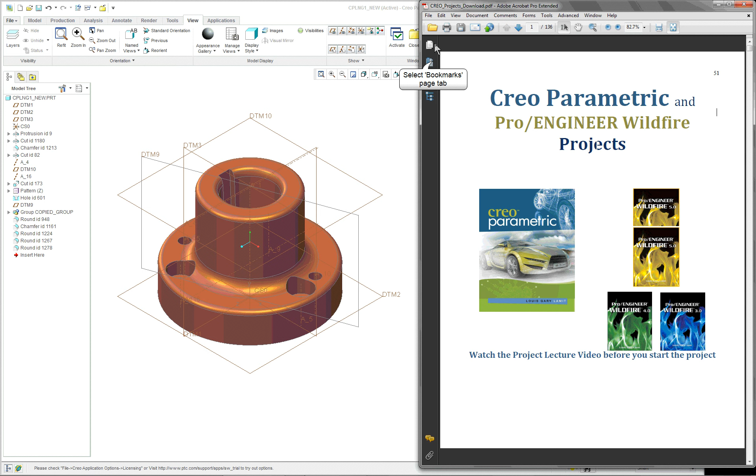This project is the taper coupling for the coupling assembly. We want to open up your project sheets, and I'm going to go down to our taper coupling on the bookmark, and you'll see that there's a complete set of drawings here. There is not any step-by-step information, so we're going to go over a sample of this.

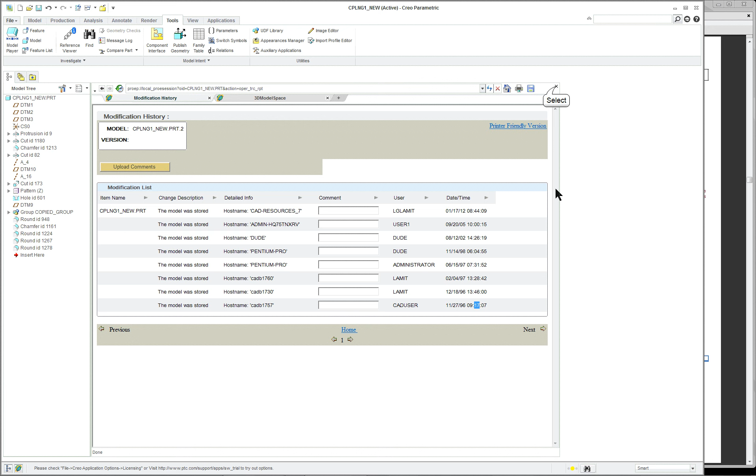I already opened up the part and put it into isometric. One of the things I want to do is take a look at the history, the file history, and you'll see that originally this was in 1996. So it's an old part created with, I would say, Pro Engineer 15 or 16, an old version.

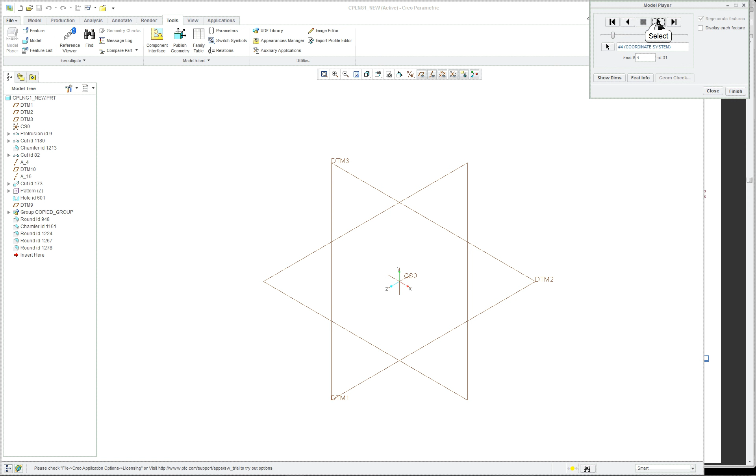So you're going to see over here in the model tree some different aspects than you'll see in Creo. But I've kept this part exactly like it was modeled in the beginning to show you some of the do's and don'ts. So I think what we'll do is go to the model player and start from the very beginning with our standard datum features, and then our first revolved feature. I think this is a pretty good way to start it.

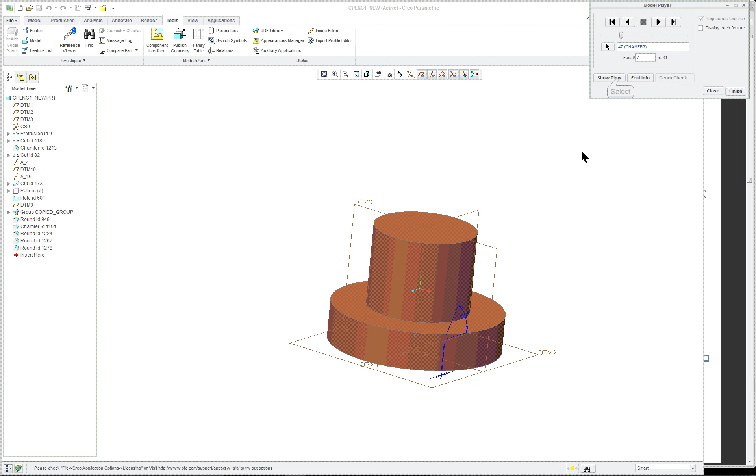It looks like they put a cut in there, and they put a chamfer on the bottom, so they're working on the solid portion. And then all of a sudden they do everything at once, and this is what you want to avoid. We'll go in and look at this later. They did the taper cut, everything all in one section.

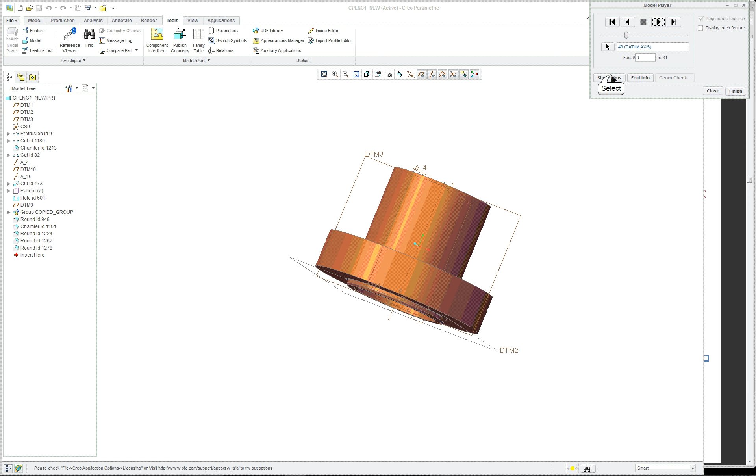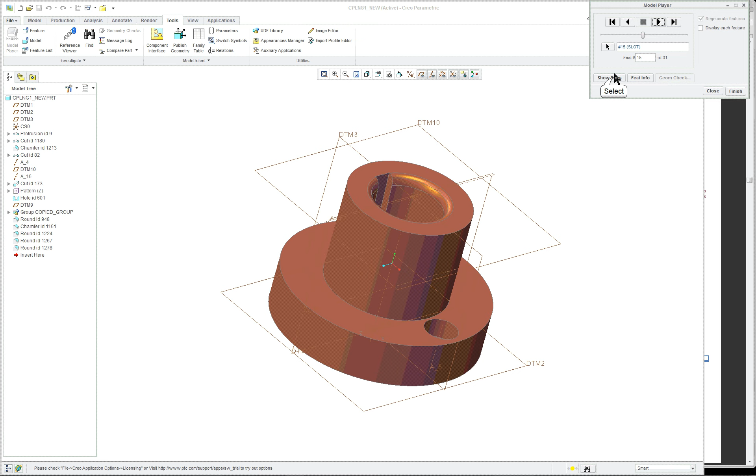Through a couple of other things. I think in general you got some rounds and some other items that they added to it. So there isn't too much as far as complicated geometry after this. You can see they put the cut down the middle here for the keyseat. And then they did a revolved cut here, and then they patterned it.

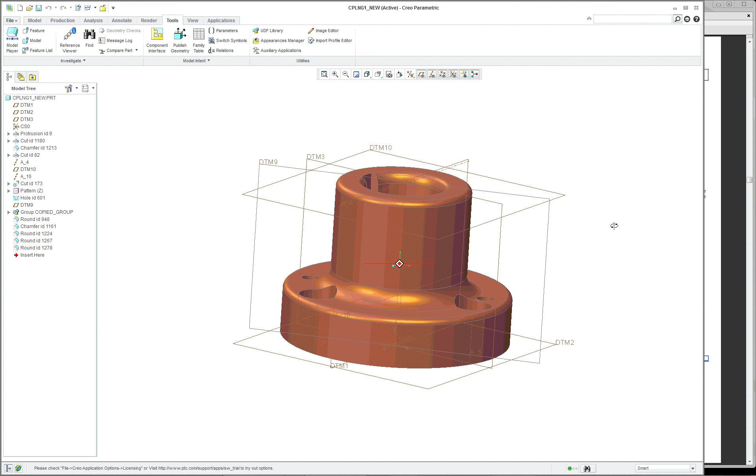So I'm going to push it all the way to the very end here. I'm going to take a look at each feature individually. Again, the very first one is very simple. They just did a revolved protrusion, and they've got their diameter dimensions in there, fairly clean and simple.

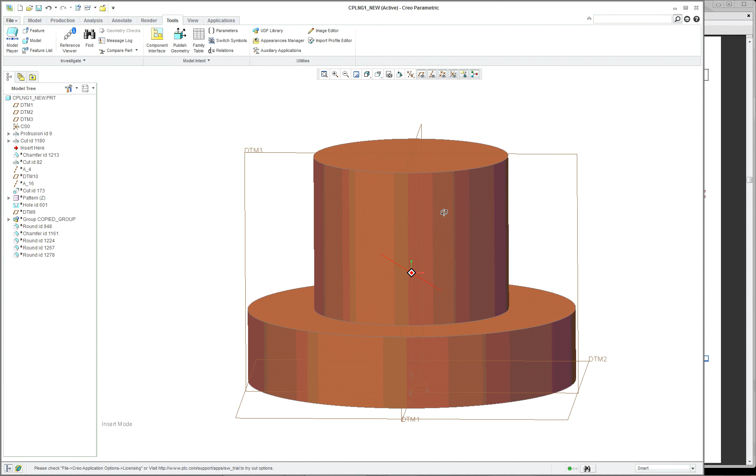I think what I'll do is back this up. Go to the cut next. They did a little cut on the bottom. I'll go into the sketch view. So it's just a simple relief cut.

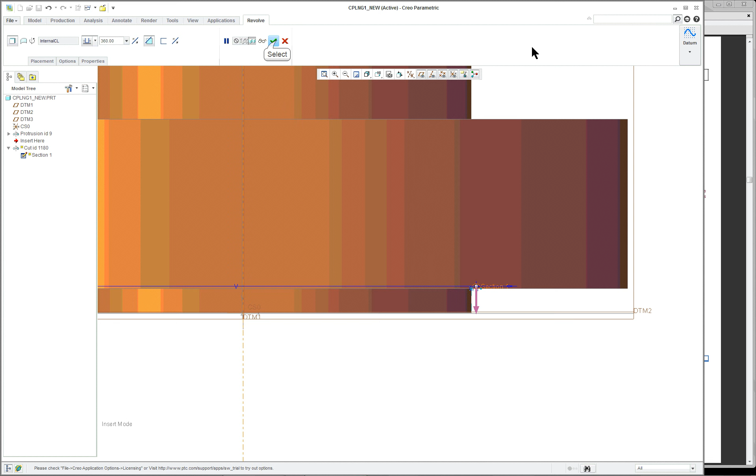They put a chamfer, another cut. Let's see where this one is. Okay, this is the one we want to take a look at.

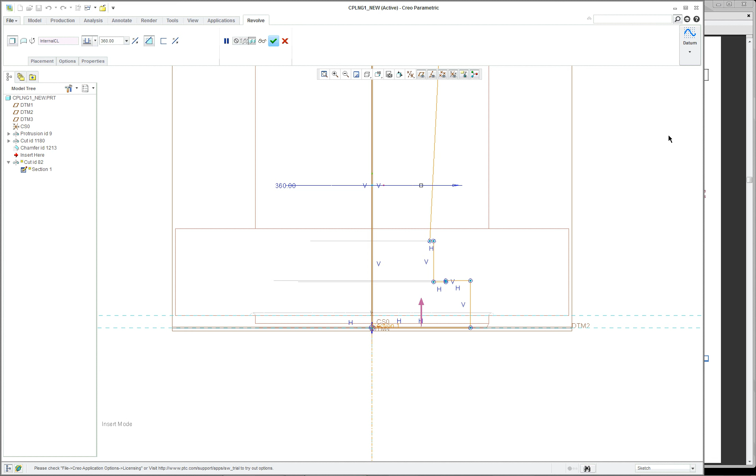It's a closed section, and let's turn on hidden line. Now it should have been a closed section. Maybe it is not a closed section. Should be shaded, I'm not seeing a shaded. Let's go into the section. There's our shading, and you can see they've done an awful lot at one time.

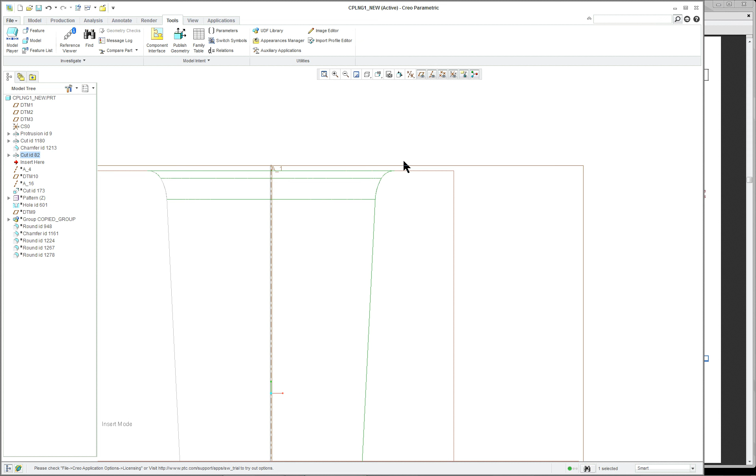It's a very complicated section, especially up in here. So I'm going to come back out. Let's investigate this a little bit. Let's really take a good look at it.

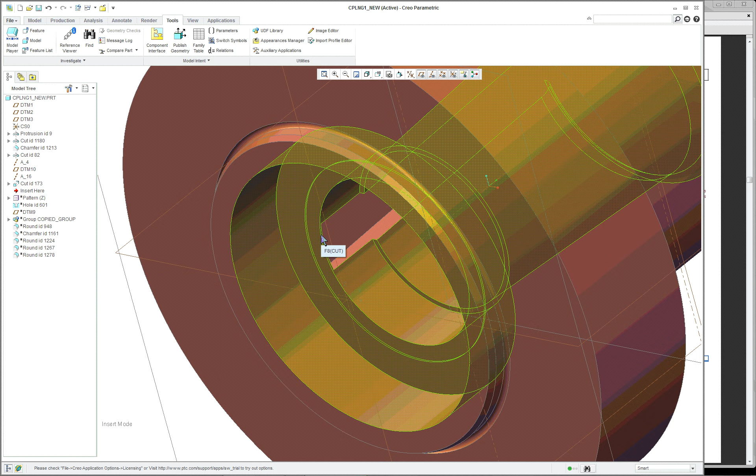So I'm going to come down. Let's see how far I want to go. Okay, I want to go down to the counter, the keyway. You'll notice here that they didn't make their keyway go all the way through to the counter bore. So this is a problem. We'll deal with that when we get to the key seat.

This cut is far too complicated. Should divide this into pieces. And I'll go with no hidden line, and maybe we'll shut off all our datum features just so that we can see it a little bit cleaner.

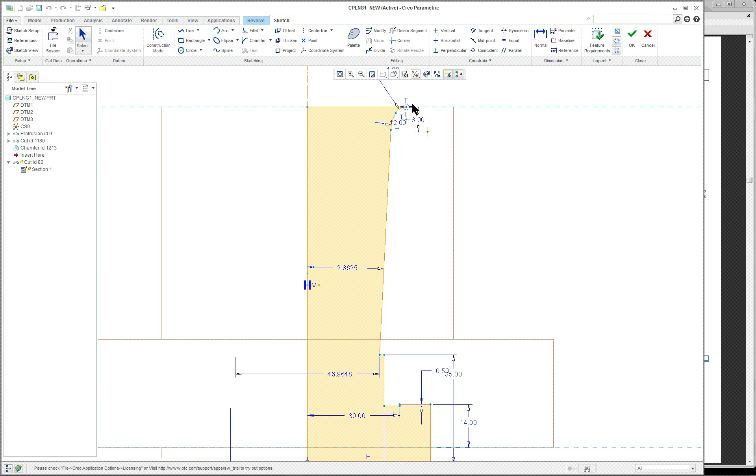So basically the problem here is you should have just done the tapered cut with the information on the top for the rounds, and it should have pierced all the way through. That way, no matter what happens to the ECOs or changes for the design on this counter bore on the bottom, this could have been put in separately. The taper should go all the way through the whole part.

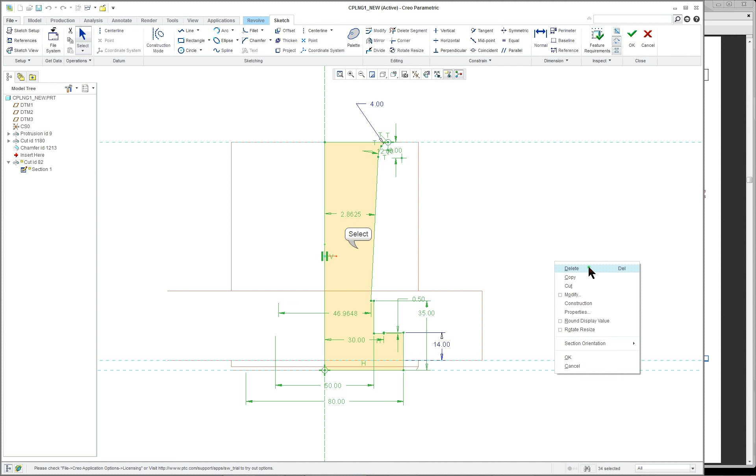So let's delete this. It's referenced by a bunch of other stuff, so.

All right, so let's start off with, we do have our references. There is a reference to the very bottom. There's an extra reference here, we can delete that, we don't really need that as a reference. We need the very bottom and the very top, and we need the axes here too, or the datum plane. We'll use the datum plane.

And we'll put an axis of revolution in, so that's a different command that was not available back when this was originally created. We had to put the axes in as a center line and then identify it as the axis of revolution. So we want to go all the way to the very bottom here.

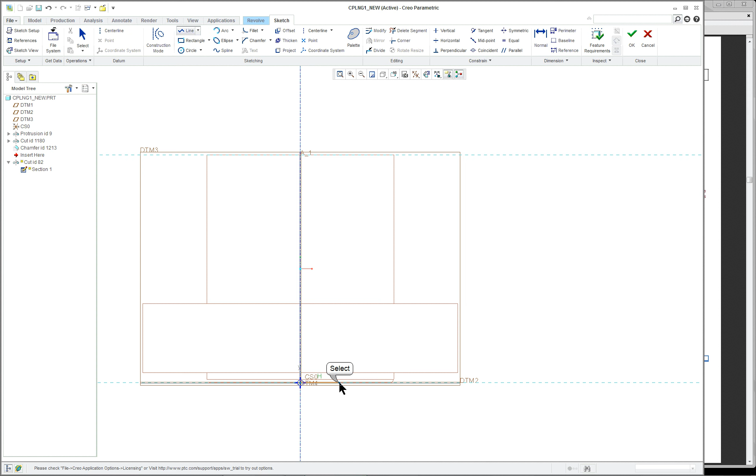So what we're going to do is start off with our line chain, and I think I'll start off at the origin down here. I'll come over and I'm going to go up near the top, but I'm going to stop. Here's the top, I'm going to stop here.

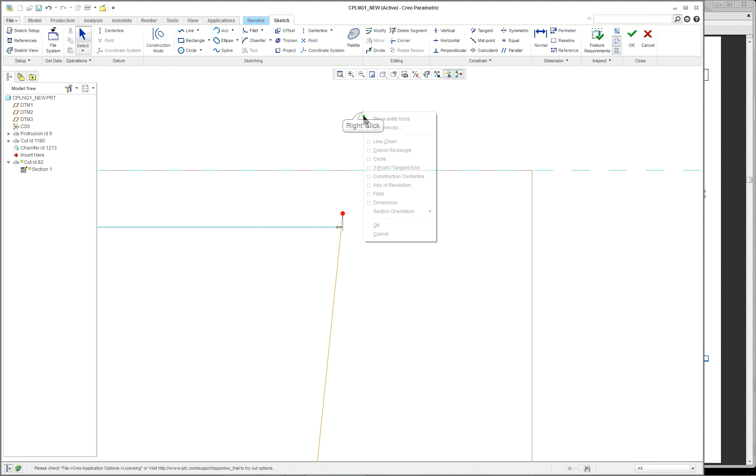Now I'm going to zoom in, and right mouse button, I'm going to use the 3-point tangent, hook it to the line, and aim at the top, not go all the way to it. Kind of a steep angle here.

Then we're going to use a fillet. We're going to click on the curve and the top, and then we've got to zoom in. Got our tangency point. Got a lot of dimensions in here.

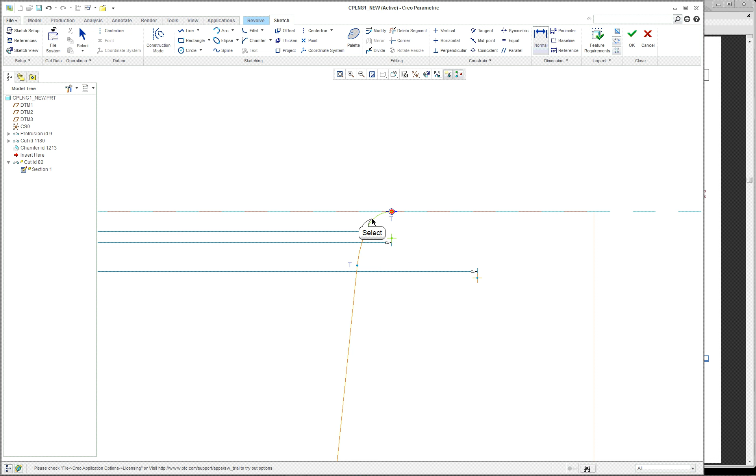There are a few things we're going to have to add, like a dimension. The book does want this. The project pages want these 2 radiuses. And there's also a diameter dimension, but we'll worry about that later because we're going to really want the diameter to go to this tangency point.

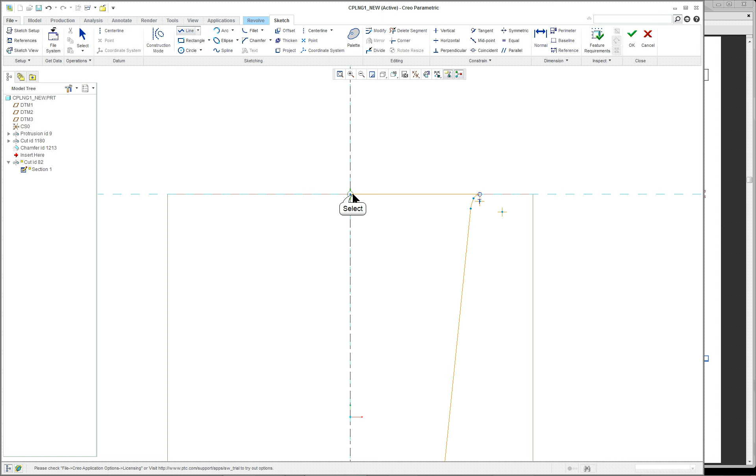All right, so let's finish this up. We want to make a closed section, like so. And we do want a dimension for our radius.

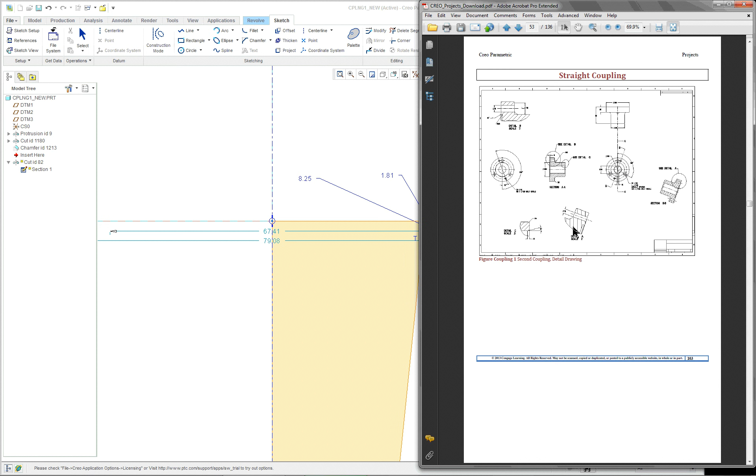So if we look at our dimensions here, let's go to, I think I have a section. We'll go down to the section. I guess this is the best one we're going to get in here.

For your taper, you can see the dimensioning scheme that's wanted. So you're going to have to do that. Right now we can leave it. The main thing that we have is these appropriate dimensioning scheme as far as our fillets goes.

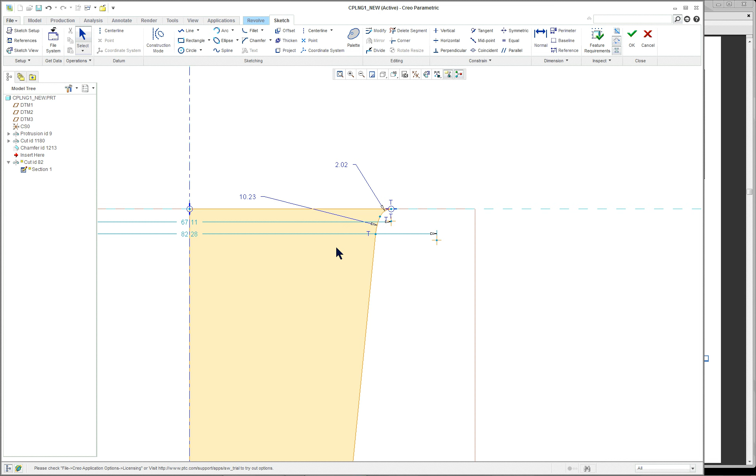Right? And again, you can add your dimension. I think which one they want is the one to the center point down here. And they want a diameter dimension. Let's see if we can get that one in there.

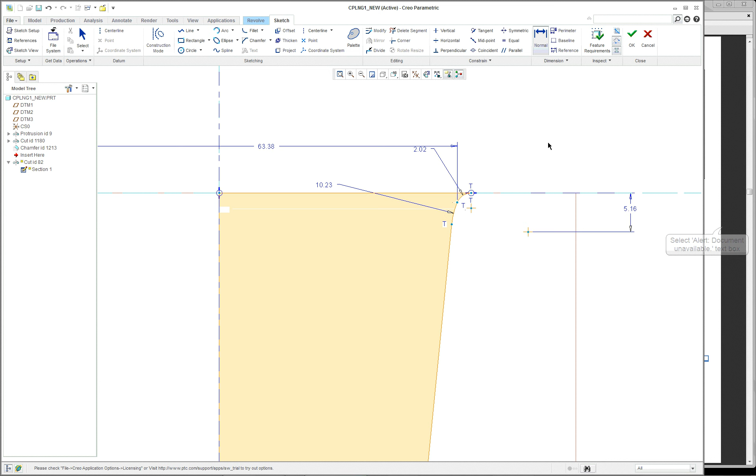So center line, point, center line, middle mouse button. And that's supposed to be, I think, 50 or something like that. Yeah, 50. So no matter what happens, the main thing also with this is make sure this angle is correct.

If it's not the same as for the taper on the shaft, then these will not go together with a coincident constraint. And that's very important. So this is 2.86.

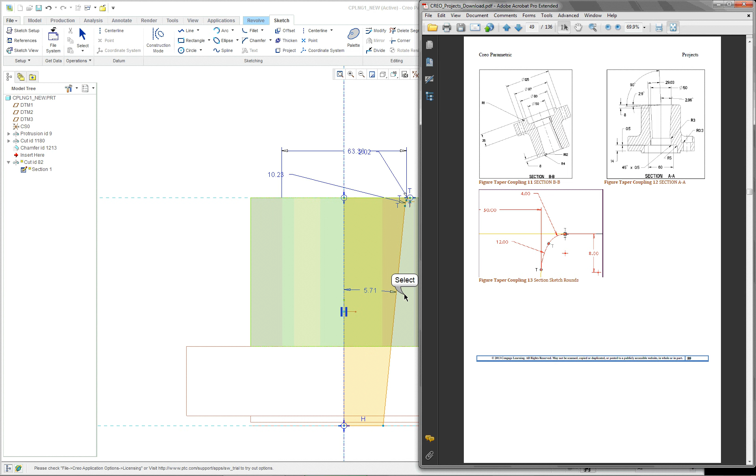And I won't bother to change all the other dimensions. The main thing to notice here is then when we're complete, this goes all the way through. So then you put your counterbore in here and you finish off the main part of the construction for the coupling.

You put your holes in, and we'll look at that, and also we'll look at the key seat. But the main thing here is that you're dividing the information into cuts so that one of them has just a cut, angle, taper, and a couple of rounds. Goes all the way through the part.

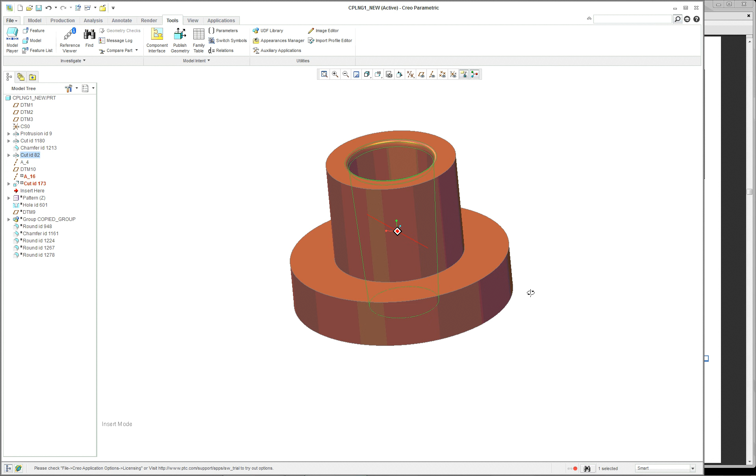So no matter what happens with the counterbore down here, it's not going to influence this first major cut of the feature. And we'll back that one out all the way, hopefully. Yeah. All right. So once you've done that, then you're going to put in this counterbore portion on the bottom.

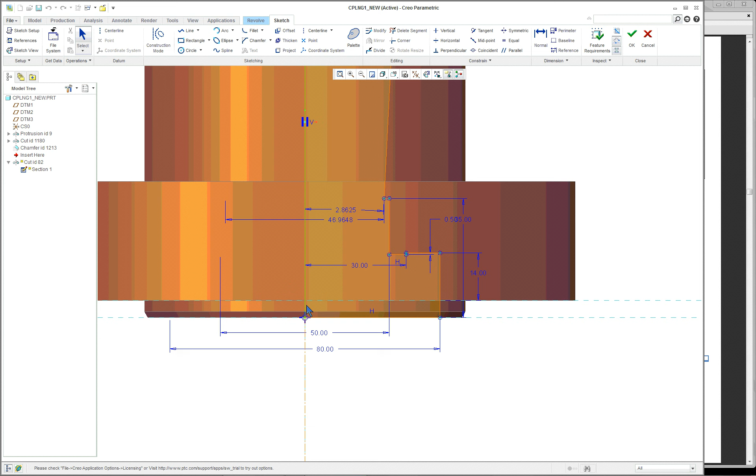And again, when you do this, this will be the second cut. And it'll be easy to divide the information up. You're just going to have this come over straight this way, and it's just going to be the bottom portion here that you put in. Much easier to sketch and accomplish that. You're not going to worry about the taper.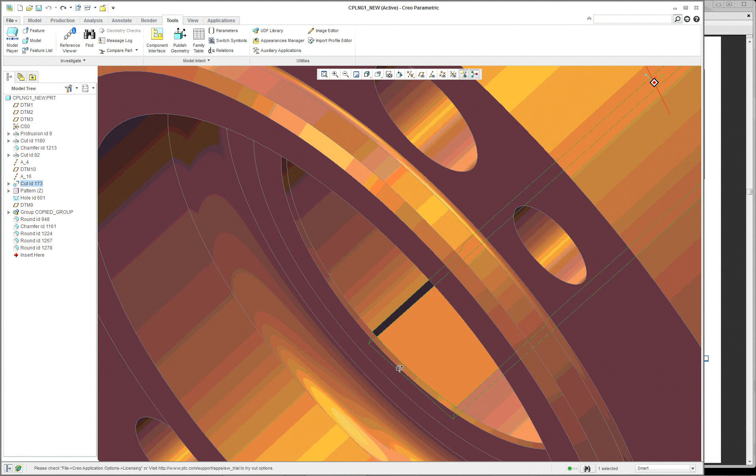So we'll go back out. Now, we did talk about the fact that this is incorrect. And we can see that it's forming a little lip down here. So let's edit the definition of that and see how they did it, first of all.

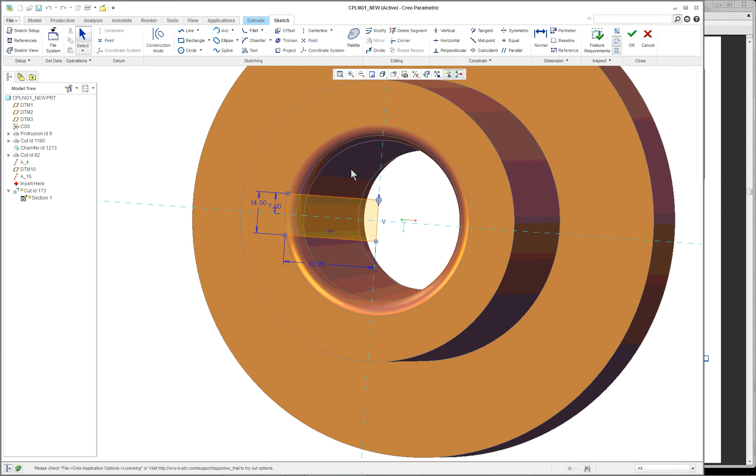So they did a lot of construction here. First of all, they had to put a datum plane in on an angle in order for this to work. Datum plane is perpendicular to the cylinder here. Then they put a cut through. Kind of strange. But what they forgot to do is to go through all. They only went up to this surface, and by doing that, they got that little lip in there.

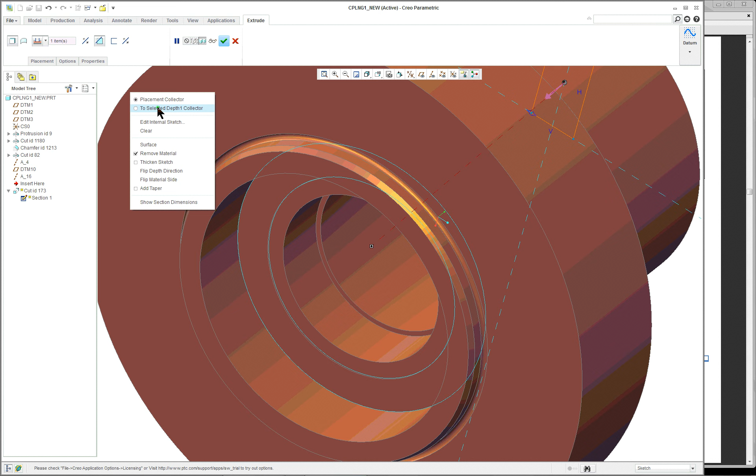In other words, the key seat never went all the way through. I mean, at the very least, they could go to the very bottom, and now the key seat goes all the way through. At the very least, that's what they could do.

But let's do this a different way. There is a better way than this. I'll turn on my datum plane, maybe the axes too. And I'm going to sketch on DTM3.

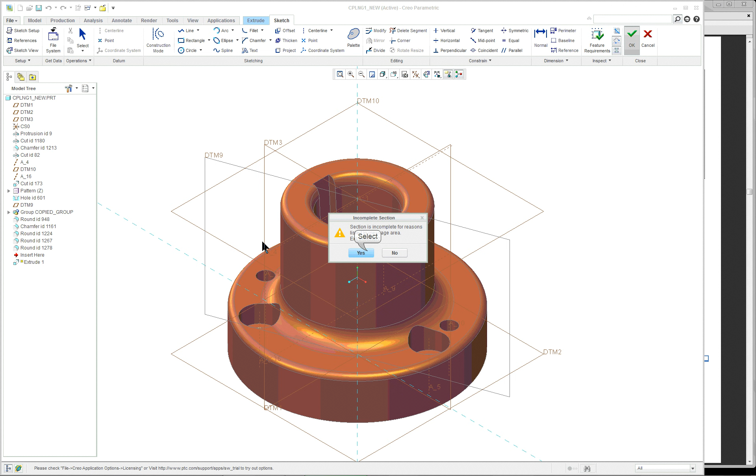I want to come out of here for a second. I want to make sure I pick my remove material. And I'm going to sketch on DTM3, like I said.

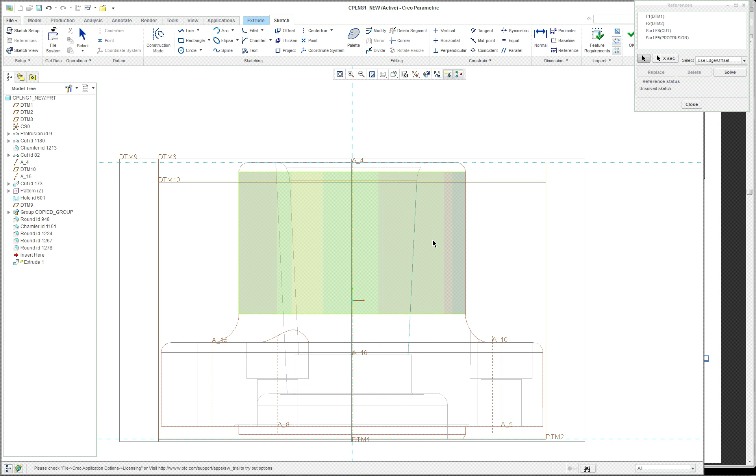All right, so here, instead of looking from the end, we're going to look from the side. And our most important thing here is the reference of the angle of the taper. We need one on the top. We've got one on the bottom also. So we simply need to do one line here. And make sure it's parallel.

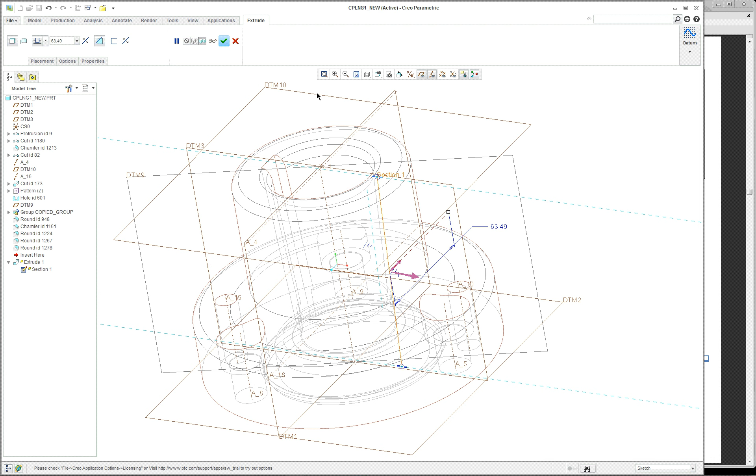You can adjust this dimension as per the book. And let's go back into our shading. And be careful here. You obviously want to know which way you're going to go with it. How about if we're cutting this way? Also, we want it to be symmetric. A little big.

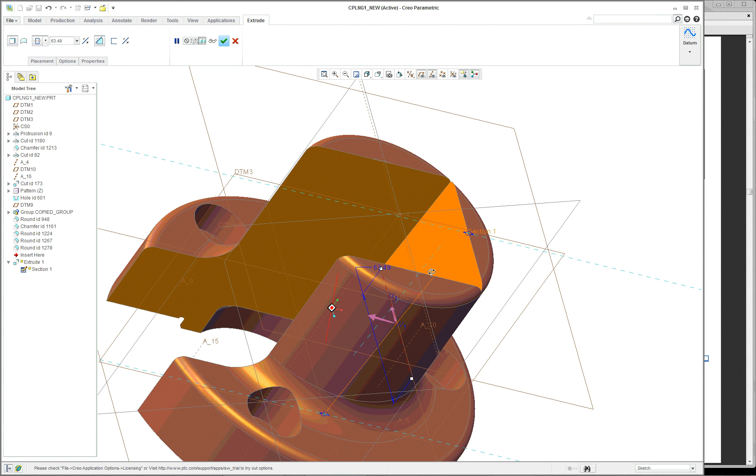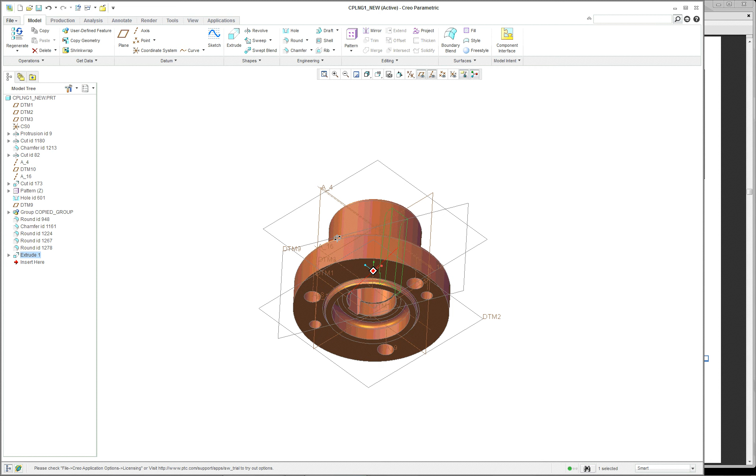I'll leave it kind of large so we can see it. So, one line. No matter what happens to the part, as long as the taper is there, the keyway will be there, key seat.

So the other one is more complicated. This is just one line, very easy to do. It's controlled by the taper angle, and you're done.

All right, so the next one we want to look at is the cut here. And we have a hole. Well, we can go through that one. Let's go through the slot. Now, a slot is nothing more than a revolved cut.

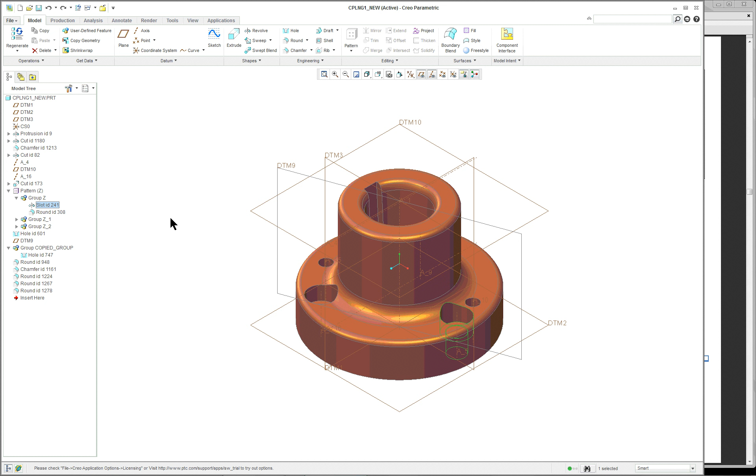So they did this a little bit different. Edit the definition of it. This is an old style command. When you do it, you're not going to be in the dashboard, so that's why it looks like this.

We'll go into the sketch view. Now, it's kind of interesting what they did. They just did a revolved cut. The only thing they forgot to do here is they forgot to use the diameter dimension.

So, dimension, center line, line, not center line, center line again, middle mouse button. Nope, I didn't get it. Let's try it again. So we'll try the line first. Make sure we're picking up the line.

Oh, okay, so the person didn't put a center line in there. So it looks like a center line. Let's see what it says. Nope, just a line down the middle.

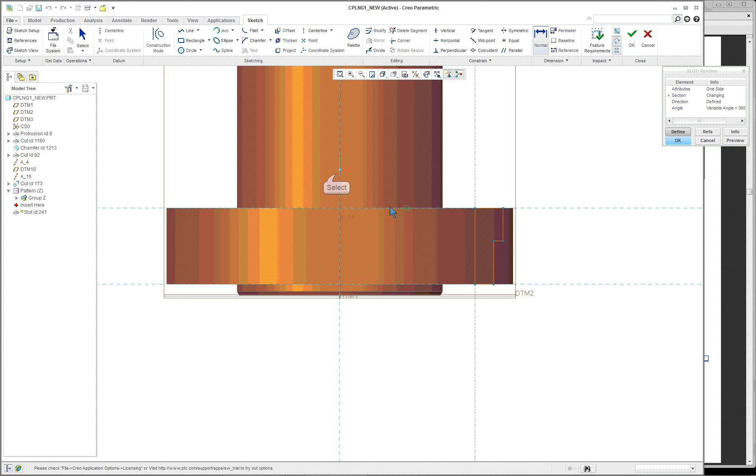So let's put a center line, axis of revolution down there. Okay, and then dimension, center line, line, center line, middle mouse button, and get rid of the half dimension.

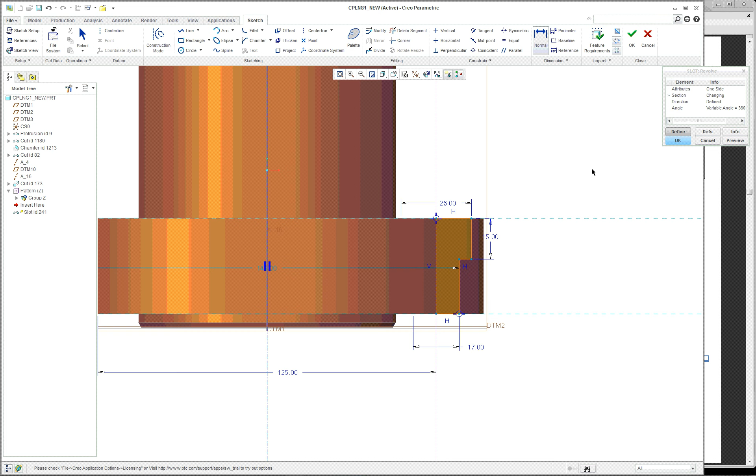So at least we have a bolt circle diameter. Now the other thing they did when they created this one, they used a revolved cut, of course, called a slot. Yours would be a revolved protrusion, removed material.

But they referenced the top so they could get the counterbore dimension in there. That's a good thing to do. Got the counterbore diameter here. Counterbore diameter, I mean the hole diameter in the bottom.

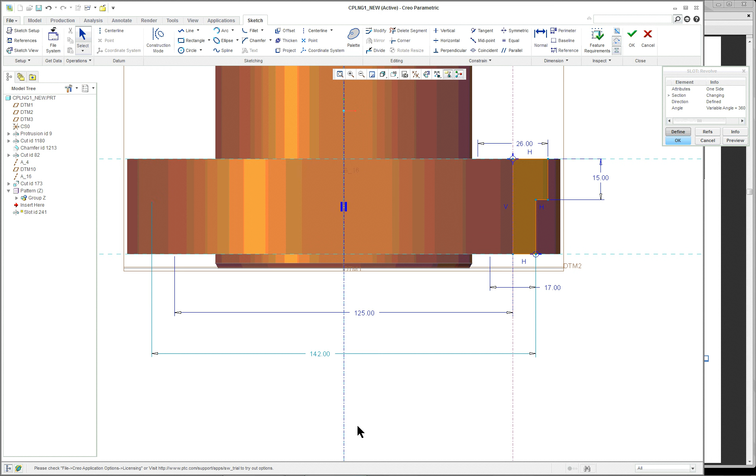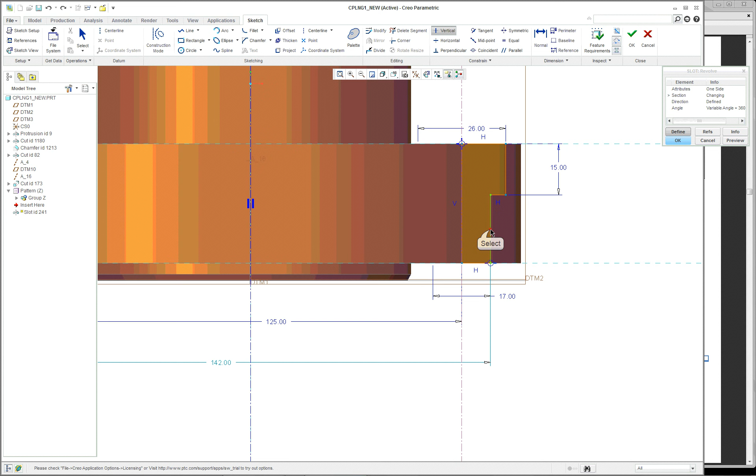I don't know what this is for. Kind of an odd dimension to have there. Let's change it. Oh, okay, so they've got something screwy over here. Let's put in a constraint. There we go. So we made that vertical and got rid of that extra dimension.

So this is one way to do it. It swept it around with the pattern. So I was messing around with that particular feature.

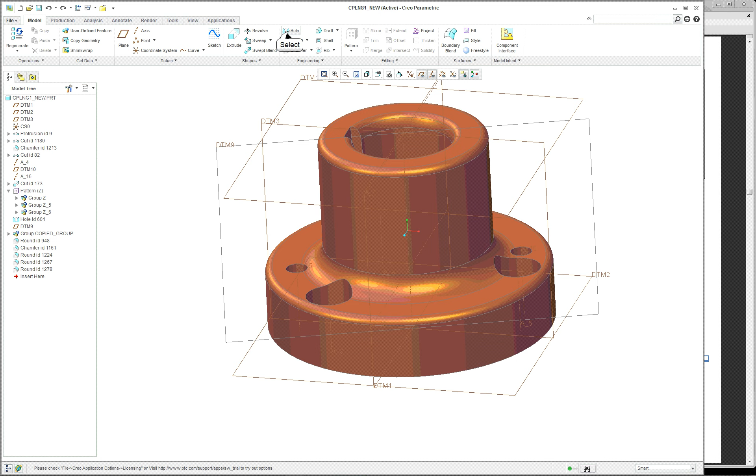So there's another way to do this, obviously, and that's just to put in a simple hole. So what we'll do to put the hole in, instead of using a revolved cut, let's turn everything on so that we can see all of our features. I had turned them off. And I think I'll go to the standard orientation.

And I'm going to put a new hole in instead of using the revolved cut. The type of hole is going to be a standard hole, no thread, clearance hole. It's going to be through. It's going to be a counterbore. And I'm going to place it on the same flange area here.

In the offset references, I want to pick the center line. But actually, I should have done this first. I want to make this a diameter. And then hold down my control key and pick on one of the datum planes so I get an angle. I'll leave it where it is. Let's look at the shape.

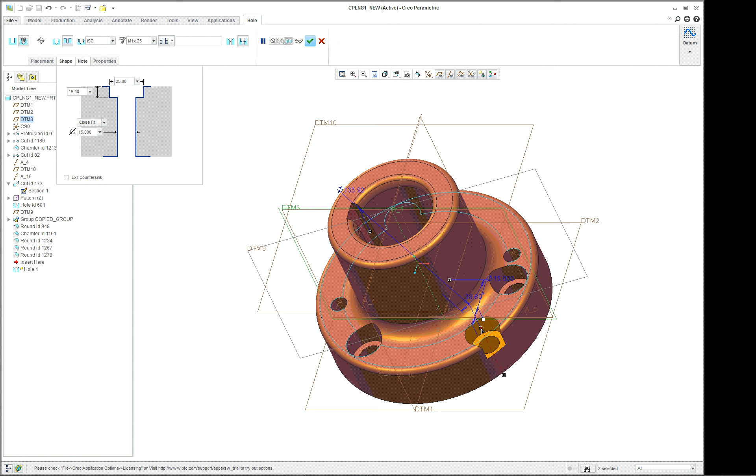So let's make this, I think it's 25. And I think the hole is, well, I'm just going to guess, actually. I'm not going to go exactly like the book, just to show you that it can be done. Now, I'm a little bit far out on this one, obviously, so I would have to decrease the counterbore there.

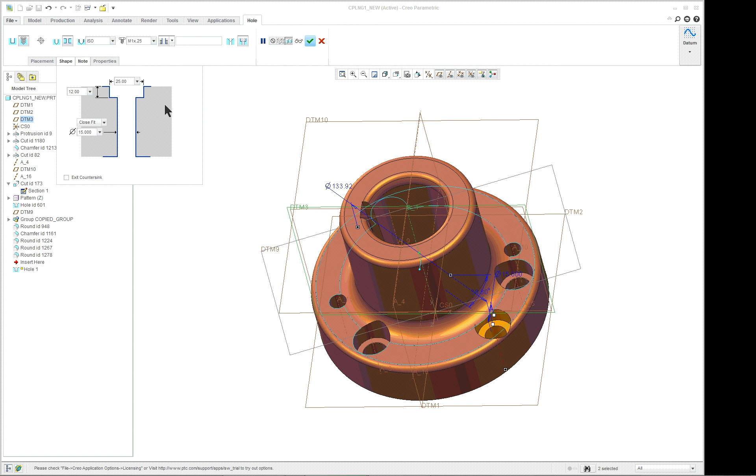And let's change the size a little bit. No, it's actually bigger than that, isn't it? So that looks okay. All right, just to get an idea of what it would look like if we did it this method.

So there's my hole. I know it's not an exact correct spot, but what we want to do is take it and move it so that it comes above the group here and it pierces the fillet.

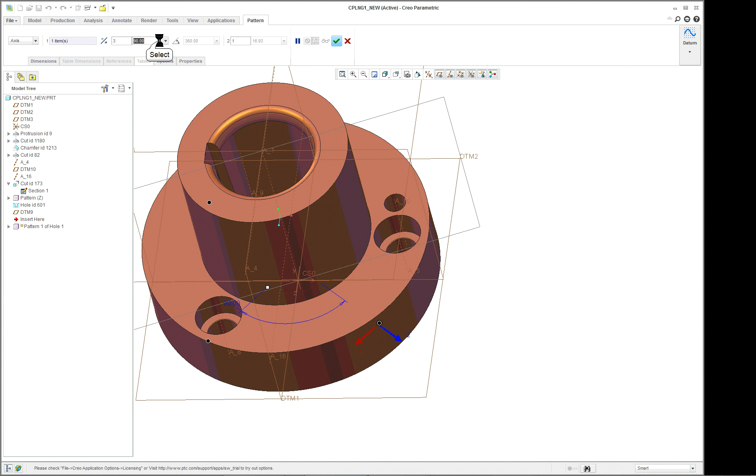So then from there, of course, we can simply pattern it. You have your dimensional pattern, or you have here, in this case, would be an axial pattern. Axis would be here. We would want a total of 3 at 120. Let's see if that preview is okay.

And there it goes. And again, it's not in the right spot, but it is a quick way of doing it compared to using the cut method. This ends the taper coupling project.